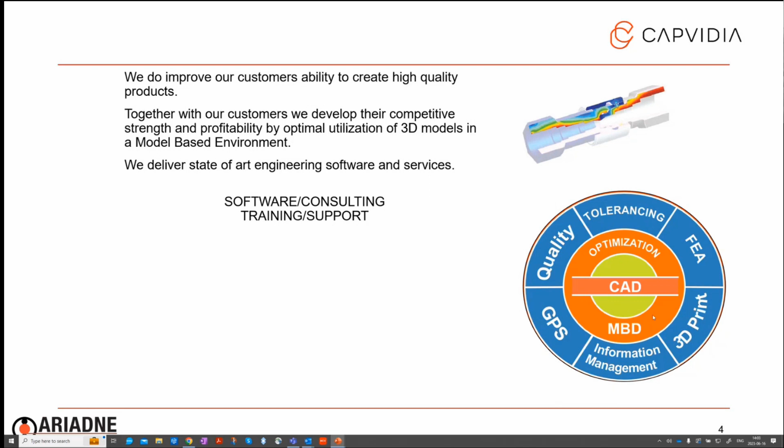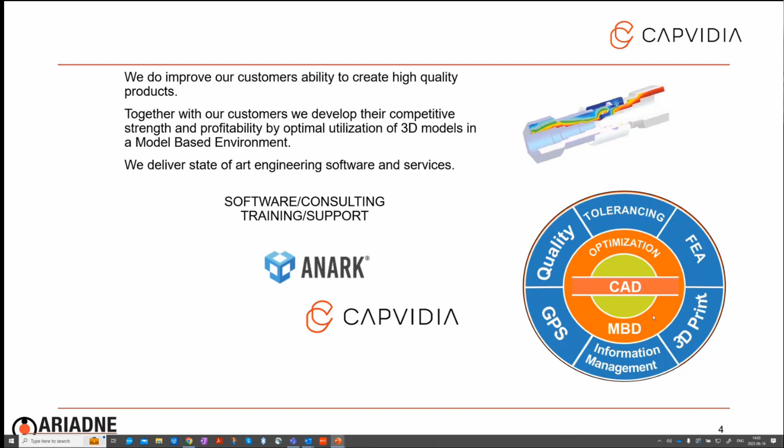We work with the following partners. Anark is an American company developing software for intelligent information sharing. Capvidia will be the central point of this presentation, a company developing software supporting metrology processes. And finally, Sigmetrix, automatic tolerance analysis with the main product CETOL 6 Sigma for 3D tolerance analysis.

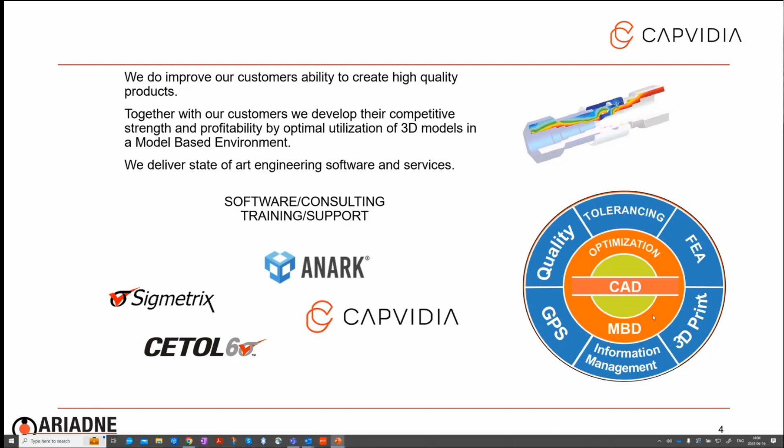Let me tell you shortly about Capvidia. Capvidia is the company behind the new ISO standard QIF. They developed the standard. They work closely with the ISO committee, ANSI committee, 3D PDF consortium, and other companies setting rules for information transfer, so to say. And they also work closely with major CAD vendors like PTC, Siemens, SolidWorks, and others. The software based on the QIF format is supposed to support metrology processes.

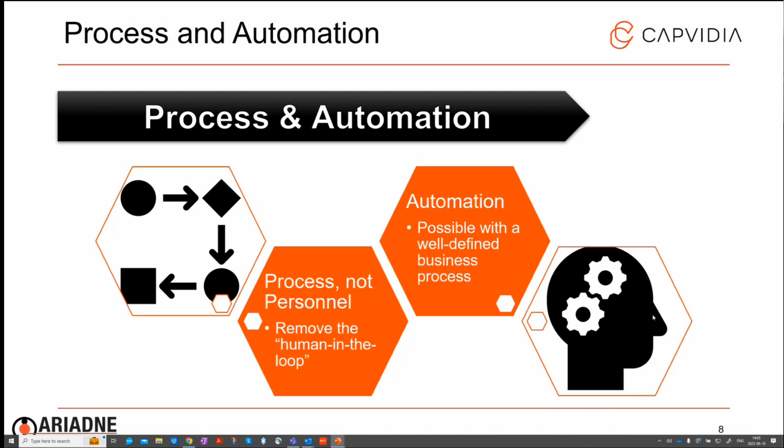And what is the value of automatic inspection? We would like to cover everything within product development, from design, manufacturing, and then quality control. We would like to go upstream, so capture and automate processes. And we would like to also go downstream, so unlock the measurement data for the design department to improve the product, not only use it for a go, no-go decision, but unlock the knowledge which is there. Looking at upstream processes, we would like to eliminate human errors and manual parts of the process and make it automatic.

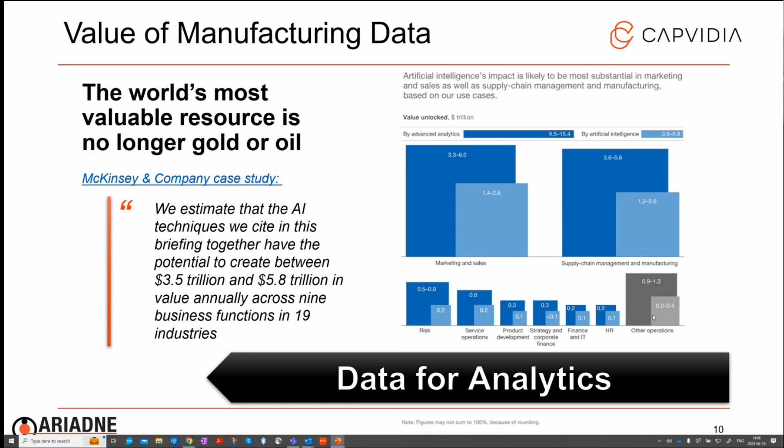When looking downstream, everybody's saying the new gold or oil is information. The highest rated companies on the market are companies like Google, Facebook, and so on. They deal with information. And we believe that when you measure your parts, it is a very good source of information about production processes, about the robustness of your product, and so on. If we can unlock this data and use it to improve products, it might be worth a lot of money.

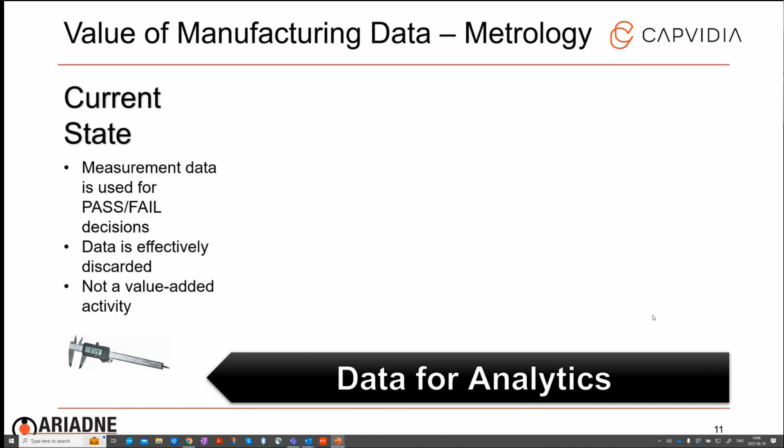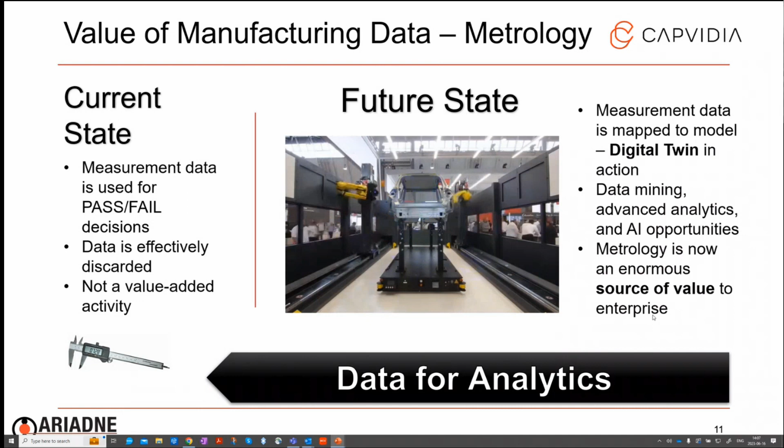So let's go further. The current state of metrology processes is mainly manual processes. Information is also used just for go, no-go decisions. So it's just verification, not added value, so to say. Imagine that we can work with regard to the digital twin concept and have full control of geometry connected to the design model. We can unlock data, maybe apply artificial intelligence to find trends and improve our tooling, improve quality and robustness of our products. So this is the intention.

And the base for this is the QIF format. QIF is the information carrier created for supporting metrology processes. It's very similar to STEP 242 in terms of geometry. We can save geometry with 3D PMI data with tolerances, but we can also put a bill of characteristics, so what we should measure, what is critical, and so on. We can also save hardware resources, best practice, CMM programs using the DMIS language.

We can also save measurement results, perform statistical analysis of the results and reconnect it to the CAD model. So basically on the CAD model, you can see measurement results, you can compare different suppliers, you can compare different batches and so on. And QIF has been an ISO standard since a couple of years ago.

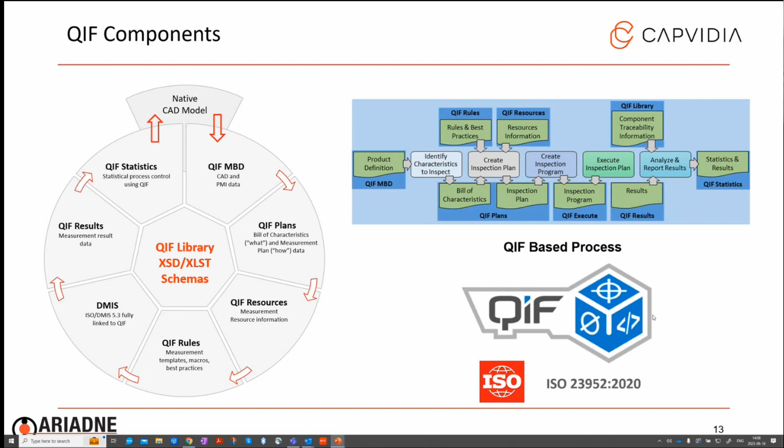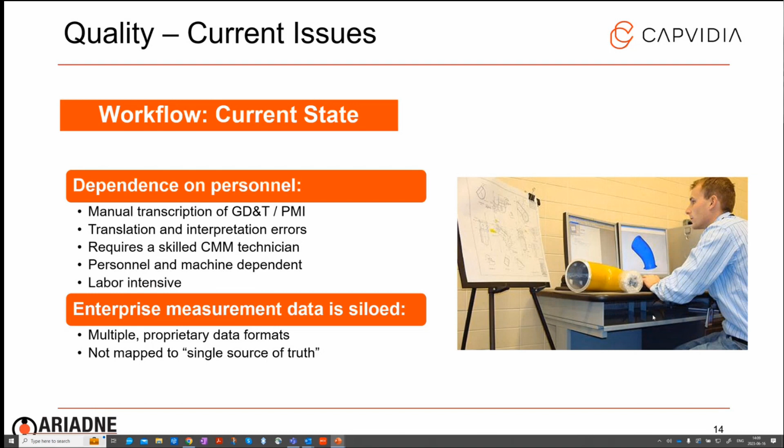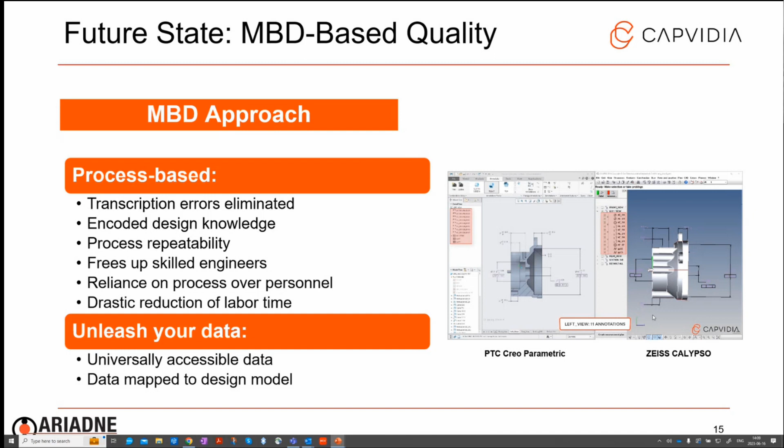Also, it means that we will make a decision, go, no go, and kind of save this data somewhere, but not use it. So we would like to propose an MBD-based approach, and basically data will be transferred from the CAD model to the measurement machine. We will eliminate all translation errors and so on, providing that we have good quality of data in CAD, and also we will unleash the results. We can do analysis of the results and improve our products.

Today, we can suggest two flows. One which is totally automated. So the lower one, MBD directly to CMM machine. And this requires very good quality of your specification in 3D and probably tweaking of the software, so all the softwares can speak to each other.

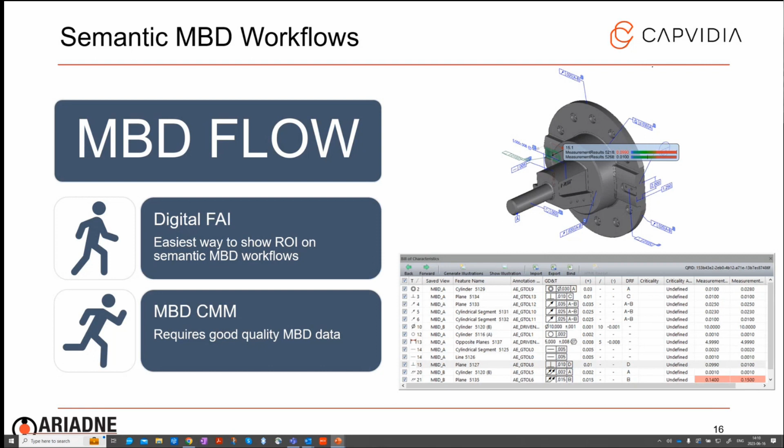The other way is to use QIF and through QIF go to Excel, create a first article inspection protocol, which is customized based on your industry standard, and let the measurement guy fill out this document, and we can save it into QIF and import to CAD. And this means that we will unlock the results, we can evaluate them, we can make them traceable, and so on.

And here is the example for model-based automated process. You see Creo and Capvidia software working together, and then transferring data to the metrology software called Checkmate. This process was entirely automated, so it's possible to do actually.

Here is an example for results. What happens when you do automate your metrology processes? We are very often talking about 80 to 90% of time reduction. I will not go into details of this project. If you are interested, please contact us. But here you see NX on the CAD side, MBDVidia and Zeiss Calypso on the metrology side with 97% time reduction. So quite impressive results.

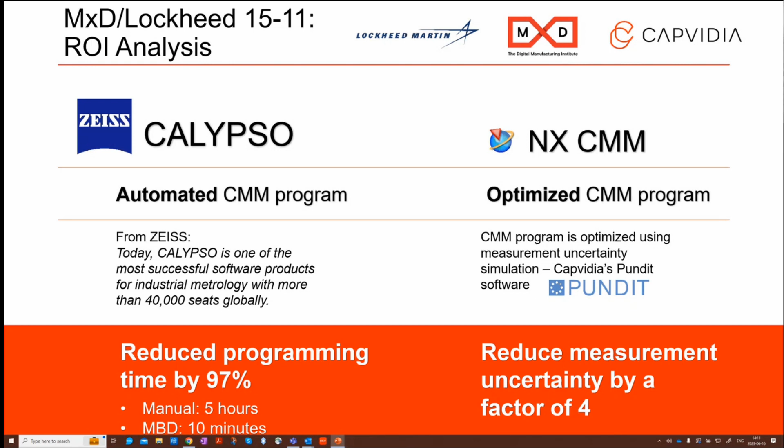And the other semi-automatic way, which we will show you today, it's more robust. It's based on QIF models. So from the CAD specification to QIF, QIF will generate a bill of characteristics in Excel. We will populate this Excel with measurements and send back to QIF and to CAD, and be able to evaluate the results. And this process is pretty robust and simple, so that's why we suggest it. It's a very good starting point.

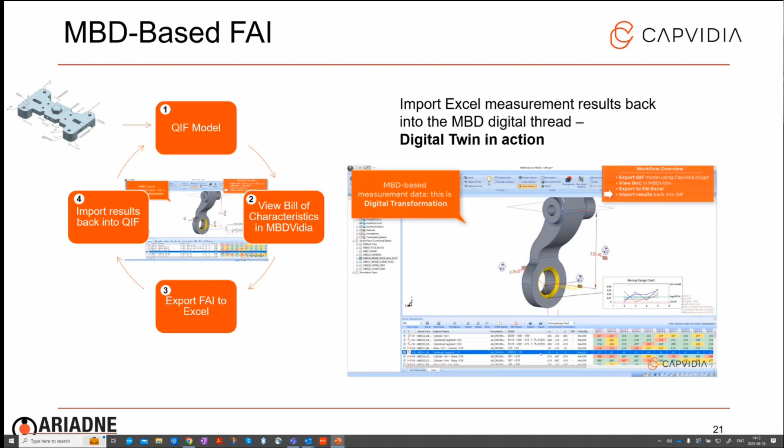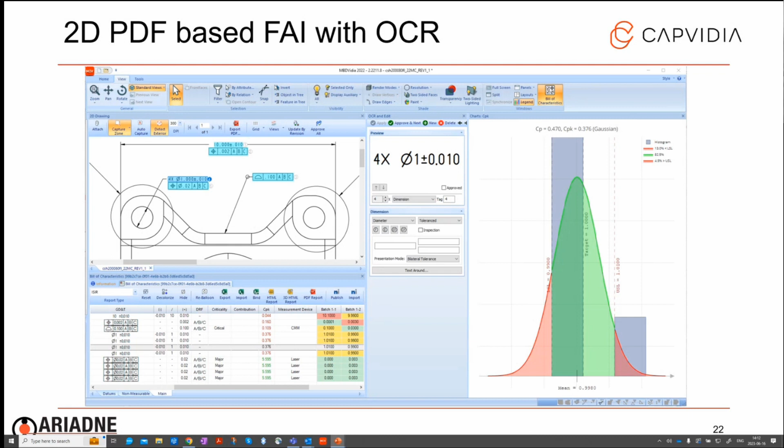And also, we can apply this process to 2D PDF drawings. So MBDVidia is using optical character recognition technology, and we make your dead drawings digital and also do basically the same stuff as with 3D models. So there is no reason to wait with this semi-automation of your metrology processes. So I hope it sounds good, but of course we would like to prove it by showing you the software. So now it's time for a 15 minute demo, and I will switch to Carl-Henrik.

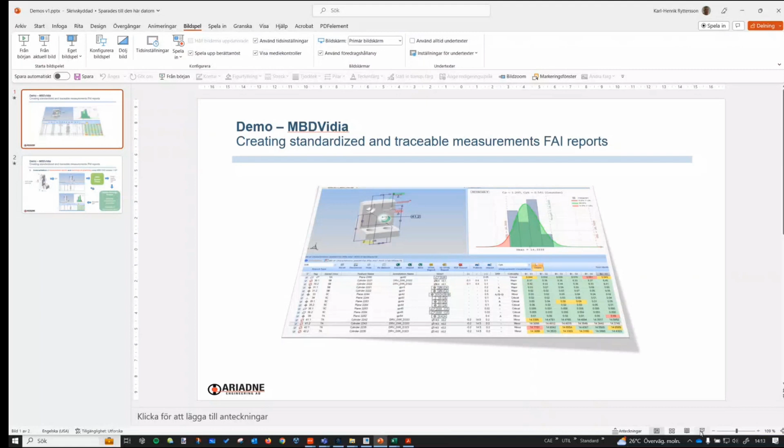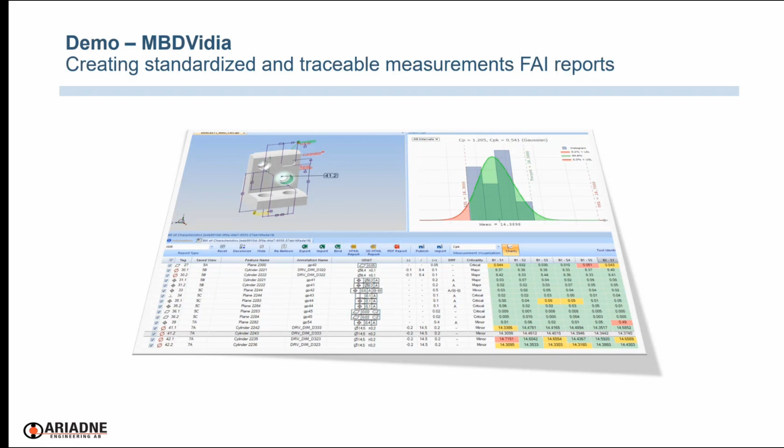Thank you very much. So basically I'm going to show you what Miroslav talked about. I'm going to show you mainly the software MBDVidia, which is going to enable us to create standardized and traceable measurement reports, first article inspection measurement reports. And I'm going to show it to you both ways. First, we're going to look at the full automation.

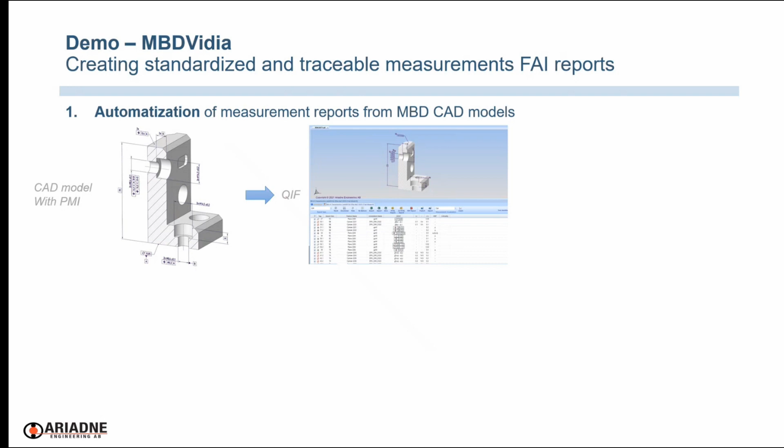So starting from a CAD model with PMI, so-called MBD. We're opening that in MBDVidia, and by that, it's going to automatically generate a bill of characteristics containing all your requirements with numbering, ballooning, and it's going to be stored in a QIF file. We can do several things with it, but one thing is that we can export this to an Excel format, an empty report, so to speak, which we can then give to the supplier, and the supplier can then fill it in.

And because there is traceability in all of this, the QIF knows that this Excel file belongs to it, and the QIF also knows it belongs to a certain CAD file of a certain version and a certain revision. So we can then import the information back into the QIF and do some simple evaluations with it. By standardizing measurement reports like this, we can easily compare different suppliers to one another, and also different revisions of components to one another.

And because we make the data traceable, we know which version it belongs to, so it gives us control over the data. As well, this enables us to make the measurement data more available than before. So not only quality engineers can access and use this information, we can also make it available for instance to design departments. So design engineers can use it to create better products. And this is a great way of bringing value to your MBD efforts.

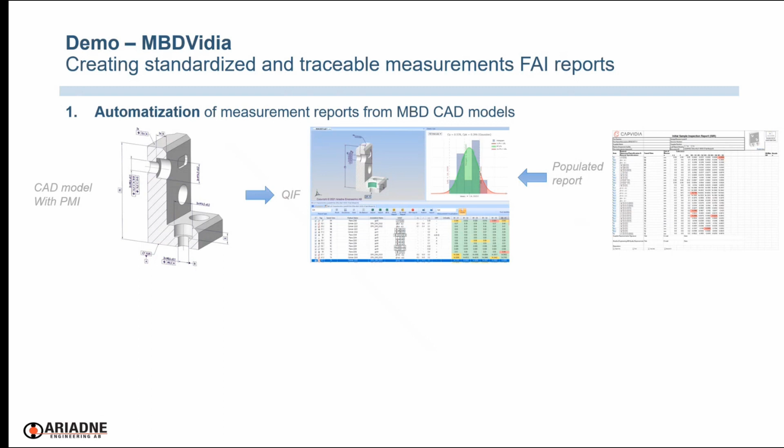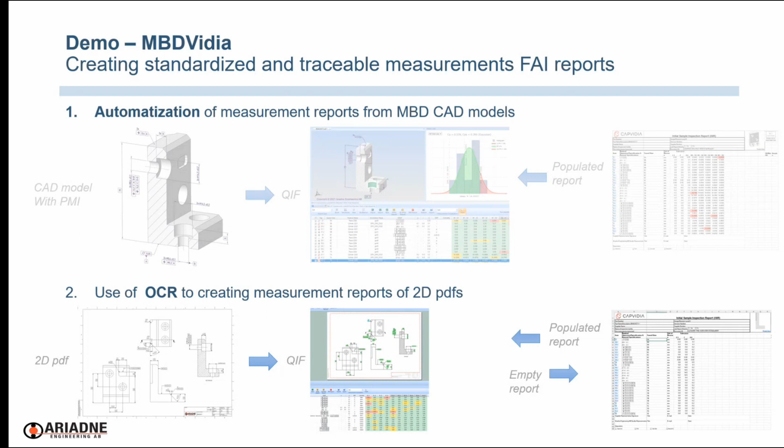So the second demo I will show you is using what Miroslav talked about, using best practice MBD in your CAD models. You might want to use your 2D PDF drawings, and you can benefit from the same with a semi-automatic process by using optical character recognition technique in MBDVidia to create standardized measurement reports. And then we can use the same scenario. I will also slightly address what Miroslav also talked about.

The holy grail is, of course, in the end, to fully automate this, not only to create automated measurement reports, but also to use this information, the QIF, to automate the metrology processes. So automatically program the metrology processes, as well as populating the report. So we want to send the QIF directly to the supplier. But before we do that, we want to make sure that the quality of the data is good enough, so that the PMI, the annotations in your CAD model, are well defined.

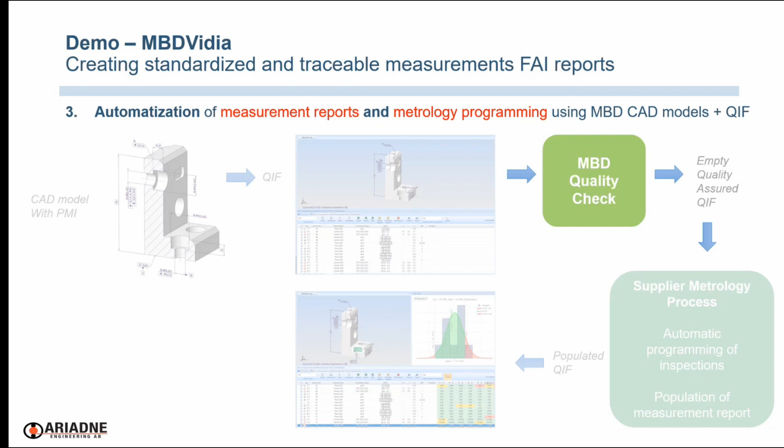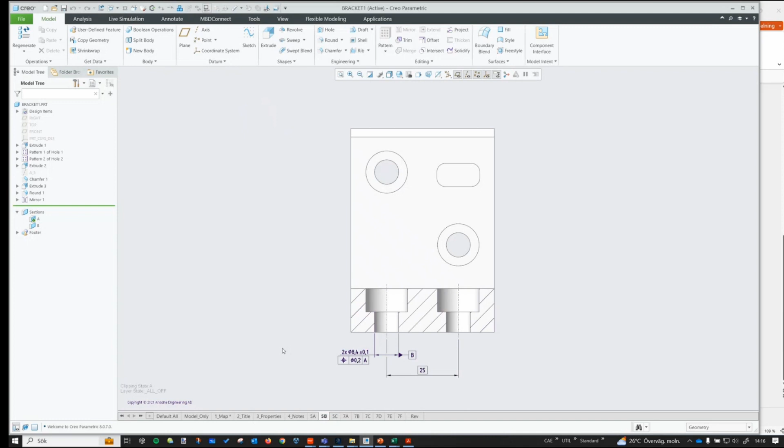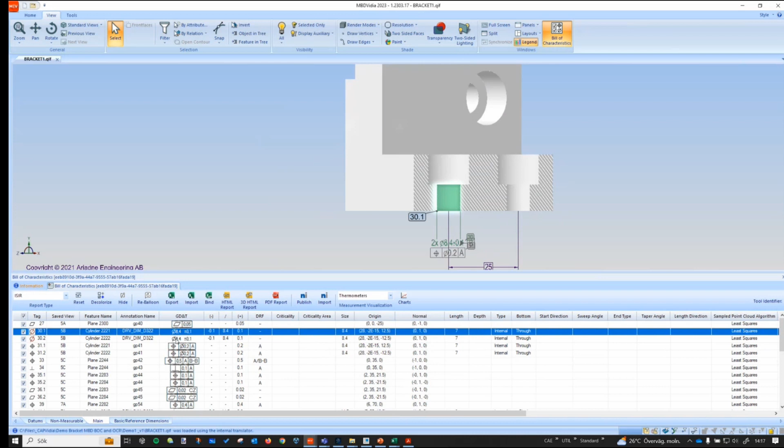So let's get started with a demo. This is my CAD model, and it contains PMI. So we're going to use the MBD approach to create a measurement report. From this, we can open directly in MBDVidia, and it's going to look like this. It looks like the same model, the same PMI coming in here, but with the difference that we have something called a bill of characteristics at the bottom of the screen. It has automatically created a list of all the requirements and also given a number to each one of those requirements. So this is the benefit of using MBD. It gets automated.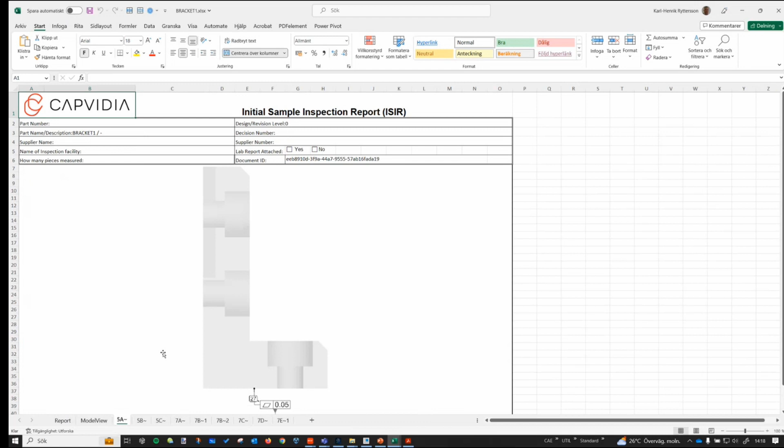So what can we do with this then? Well, in the end, we will send this QIF file directly to the supplier. But before we do that, you might consider using an Excel approach. So we can click Export Excel here, and you're going to receive an Excel format of this report, which looks like this. You have several formats to choose from, and you can also create your own appearance. This is called ISIR here. You get the same list you saw previously, but you also get pictures that were auto-generated because it's MBD. So you have everything you need in this Excel file. You don't need any additional 2D drawings in PDF or anything.

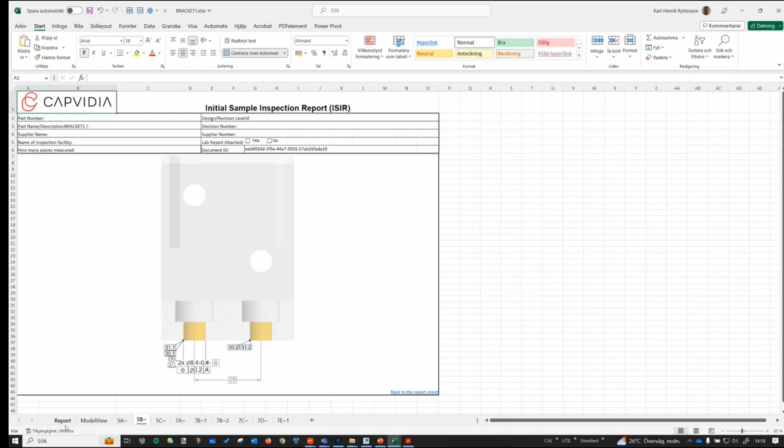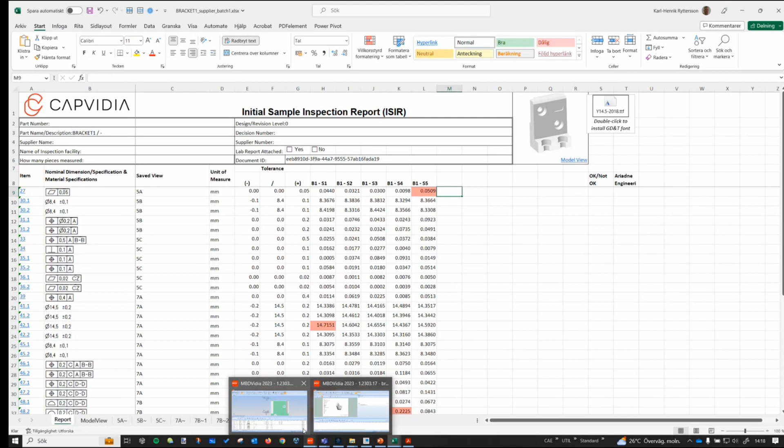Everything is contained here. So we can now give this to the supplier, which manufactures the products, then performs the metrology processes, the inspection, and fills in this list. And because of traceability, this Excel file can be reused. We can import the data back into our QIF. So if we go back to the MBDVidia application, previously we used export. Now we can use import and import the data coming from the supplier. We can even have different batches and tell them apart.

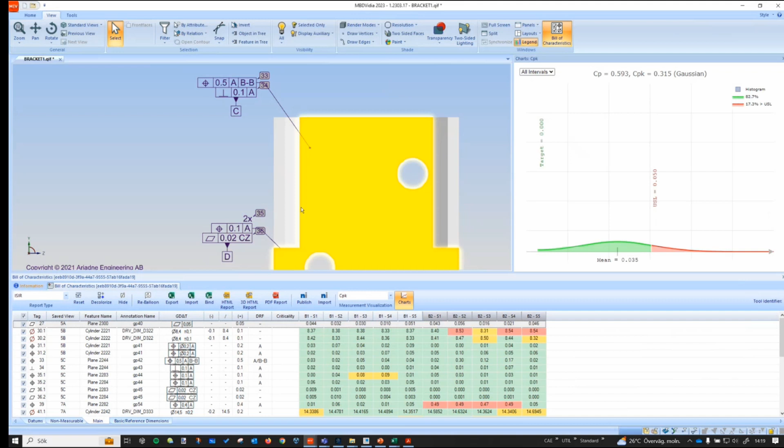So here we can see some results popping in, and I'm going to import two batches so you can see the difference. Let's say that's a new batch, and it also contains some simple tools to evaluate the results. As you can see, there's something called thermometers, and we can also look at capability values, CPK and PPK and more. So this is a way of dealing with reports in a fully optimized scenario. And now you're wondering, can we do the same when we don't use MBD, using 2D PDF? And of course you can.

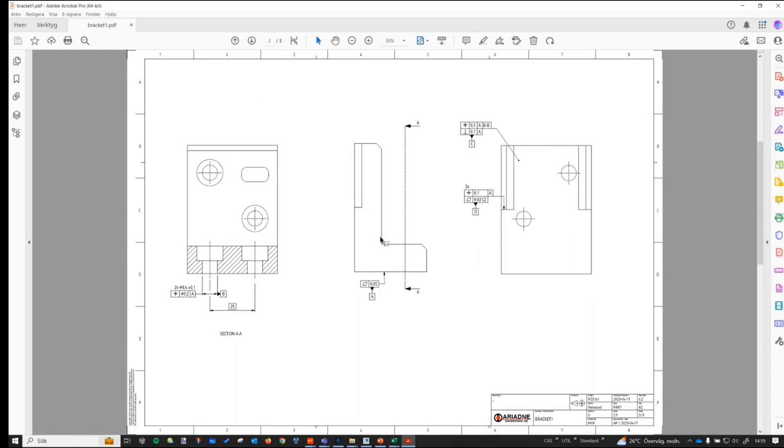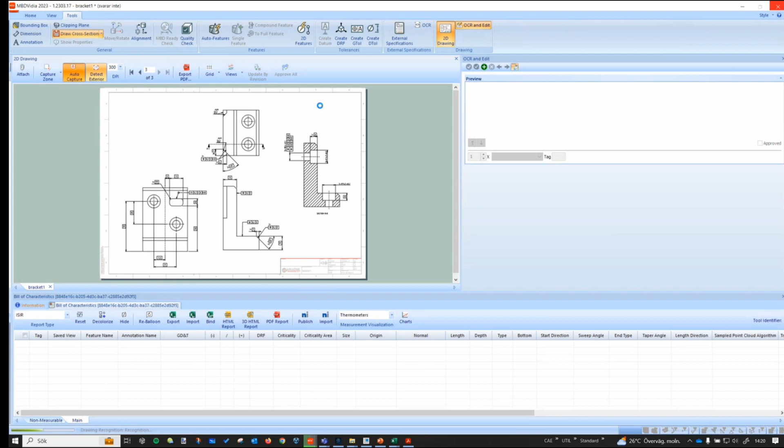So this is the second approach in MBDVidia, demo number two. Now we're starting from a different point of view. I open a regular PDF containing the usual annotations on the drawings. We can then use a character recognition technique to scan this drawing and populate the bill of characteristics. It's currently empty, so I'm going to press auto capture to try to capture all the requirements in the drawing at the same time. It's actually scanning the graphics in the PDF and trying to convert them to recognizable characters. Soon it's going to highlight certain fields in cyan, and it has actually identified lots of requirements here.

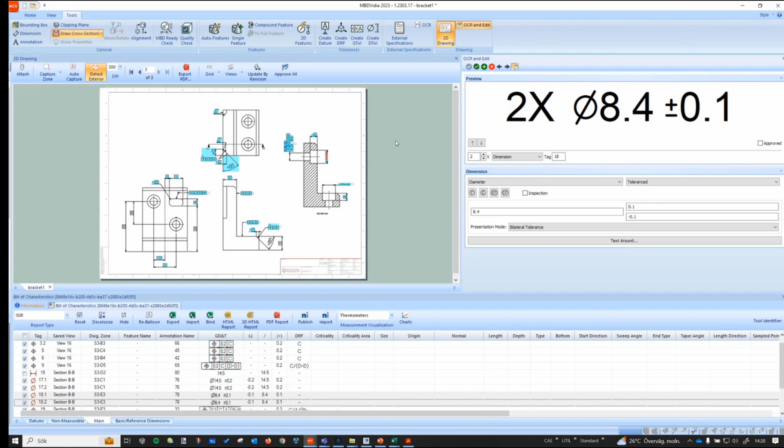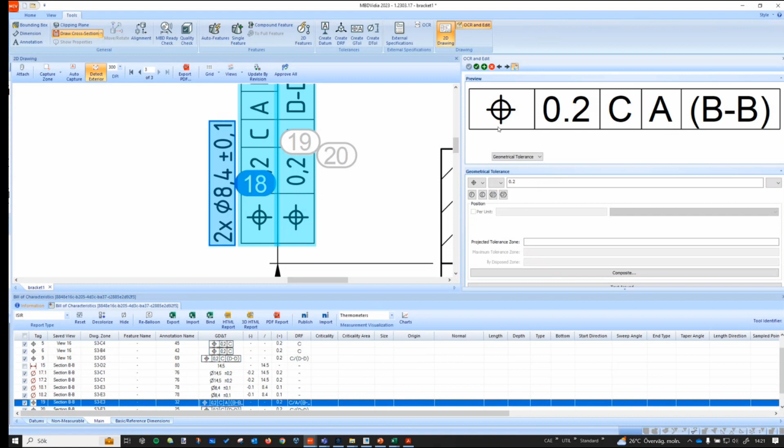So this is where MBD has higher quality of data. Before you send this protocol to the supplier, you want to make sure the annotations are captured correctly. So I want to approve each and every one of these suggested requirements. How do I do this? I look in the graphics window to the left, that's the graphics, and then I look to the right in my preview window, and that's what the recognized characters are. If they match, I'm happy. In this case they match, so I just press approve, and it turns green. It's approved. The next one is also a match, so I approve this one. And this one also matches.

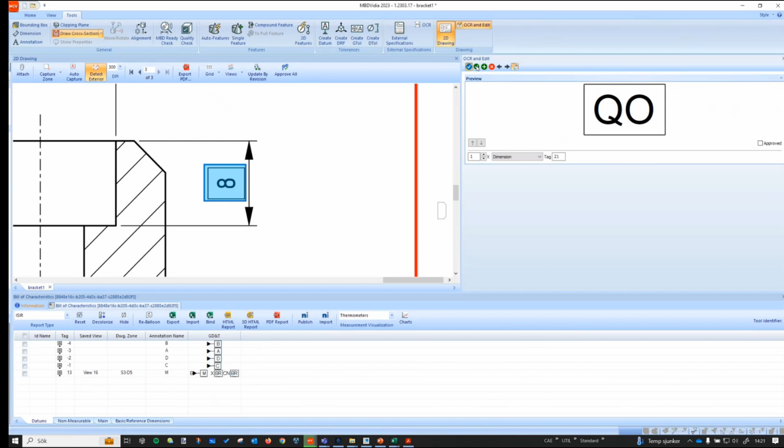So I keep on doing this until I get to something like this. And here it has not succeeded. It scanned it in horizontal direction; it should have been scanned in vertical. So I'm going to help it and say that this is not the QO, it's an actual dimension, and it has the number 8. So now it's fixed, and I'm going to approve that one.

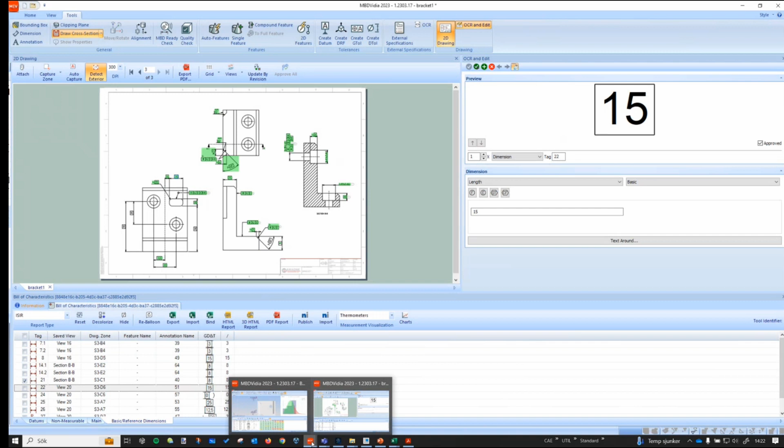And then I keep on doing this until everything is approved. I can skip to the end by approving everything. I wouldn't recommend doing this, but well, it's a demo, so we can do it a little bit faster. And then we keep doing this for all the drawing sheets. And finally, we're going to end up with a complete one. It looks like this. So here I have all my requirements, even the general requirements, turned into the bill of characteristics. So all my 3 sheets here.

And well, from here on, it's the same methods, same workflow as for the MBD approach. We can then export it to Excel and then import it back once the supplier has filled in the reports. And we can evaluate the results the same way as before. So this is a very quick demo of how these 2 scenarios work in MBDVidia.

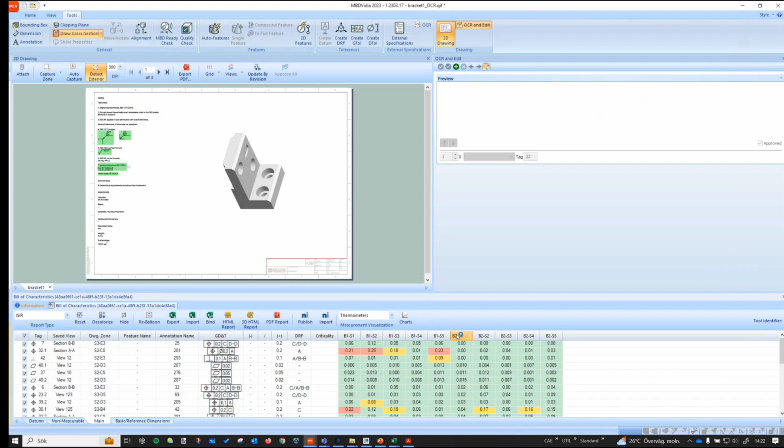And then I get to the holy grail. We want to fully automate this, so not only create reports automatically, but also we want to use the information in the QIF to automate the entire metrology process. But before we can do this, we want to make sure that, for instance, the PMI here have good quality so that the metrology software knows what to do with it. Also we might want to feed in some information about which measurement device to use and other types of metrology information along with it. Save it and send to the supplier.

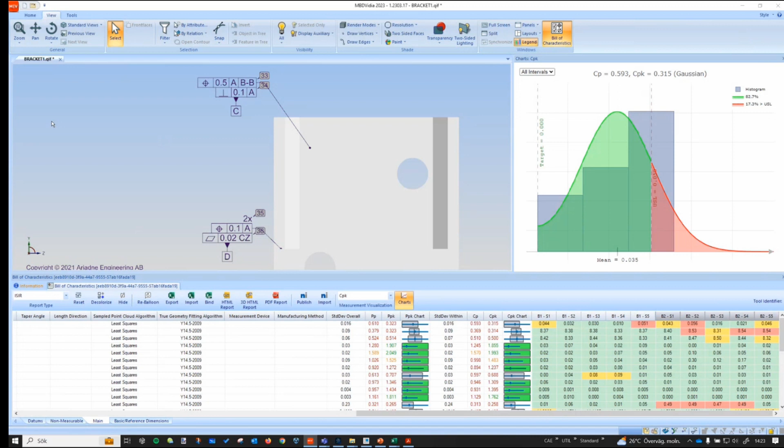But how do we control the quality of the PMI? Well, there is a function here, of course, in MBDVidia, which I'm going to show to you. So let's do that. There's a button here called MBD Ready Check. So I'm going to push it. And what it does now is that it checks all the PMI and checks basically that it's MBD ready, that it has sources referenced, all the annotations, and that syntax are okay. So in this case, it says 97% score. So it's not 100%. And there are actually 2 annotations which have some issues.

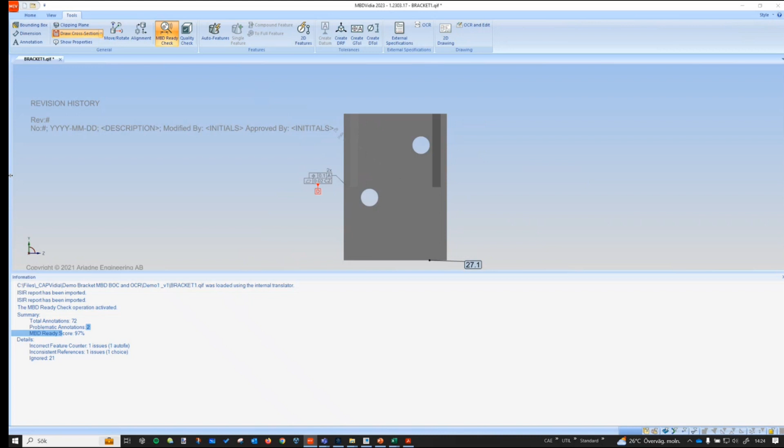So let's bring up the list of this. And here you can see that there's one here with an incorrect feature counter. So if we double click this, it's gonna show us which annotation this is all about. And it seems to be this one for the 2 times the hole 8.4. And I can see that it's incorrect feature counter because it's 2 holes, but it only references one of the holes. So now we can decide if we want to go back to the CAD model and revise it, of course, modify it.

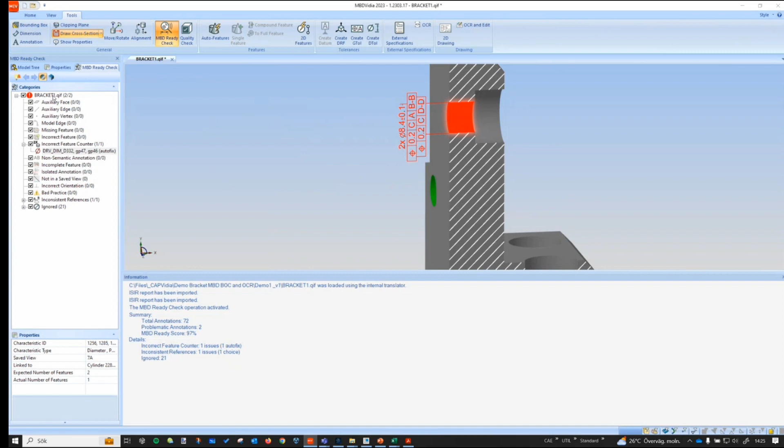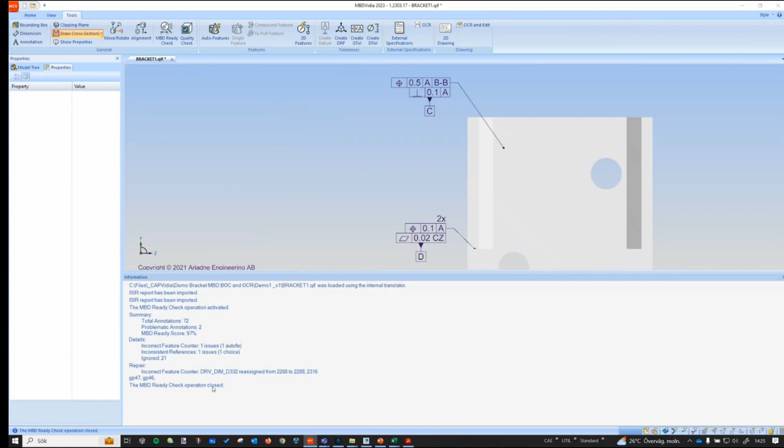Or you can choose to, if it's not a major error, use the repair tool in MBDVidia. So we can actually fix the problem here if it's too much of a process to revise the model, or if the error is not big enough to do that. So now it's fixed, so we can now redo the check, and this time it's 100% score.

And there's more to this, but since we have limited time in this webinar, I will now go on to the 5 minutes of questions, if you have such. So that summarizes my demo. I just want to also summarize.

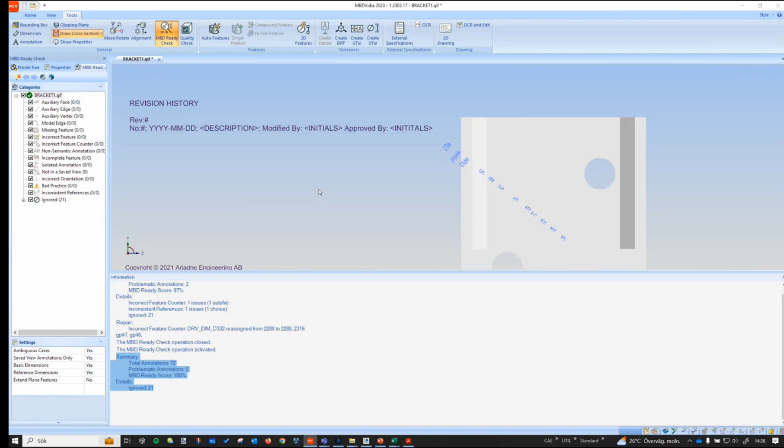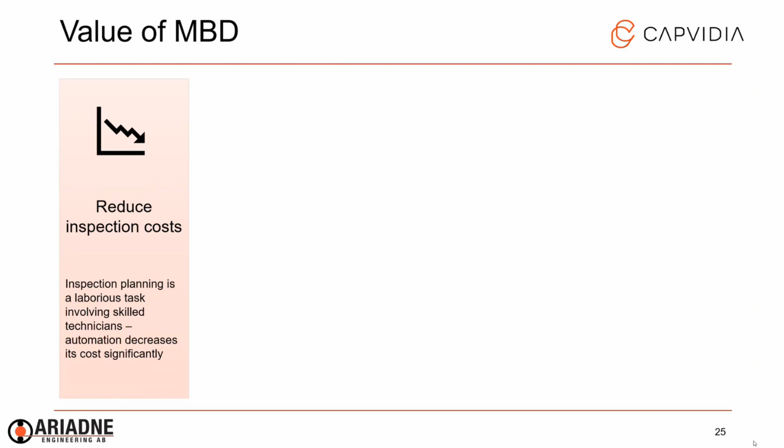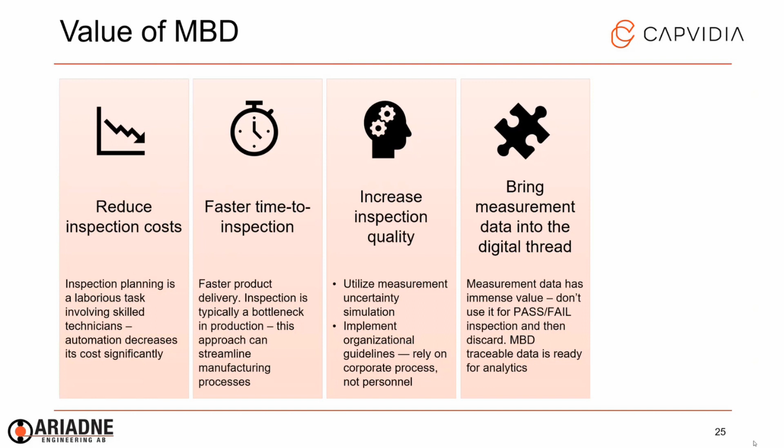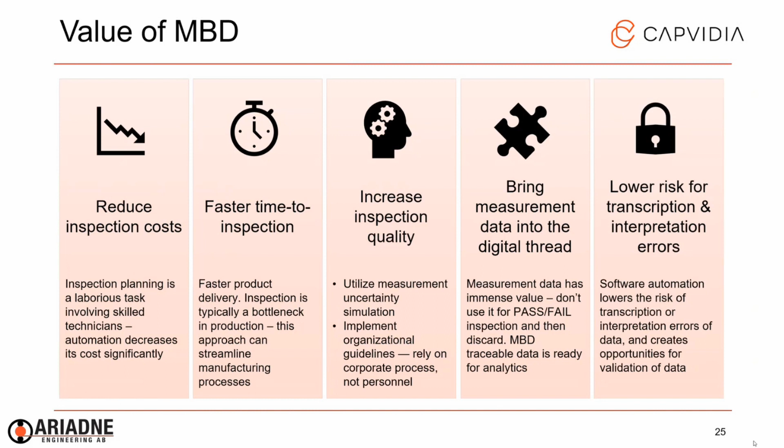If you use your model-based definition in a metrology context, you can reduce the cost of inspection, you can reduce the time of inspection, increase quality because we avoid manual errors. We can unleash the measurement information and bring it into digital thread, open it up for product improvements. And of course, we'll eliminate all the data transfer errors. So it's worth to do it.

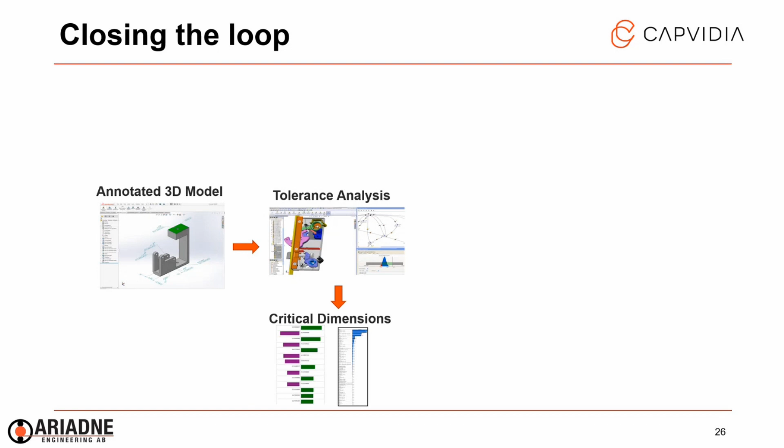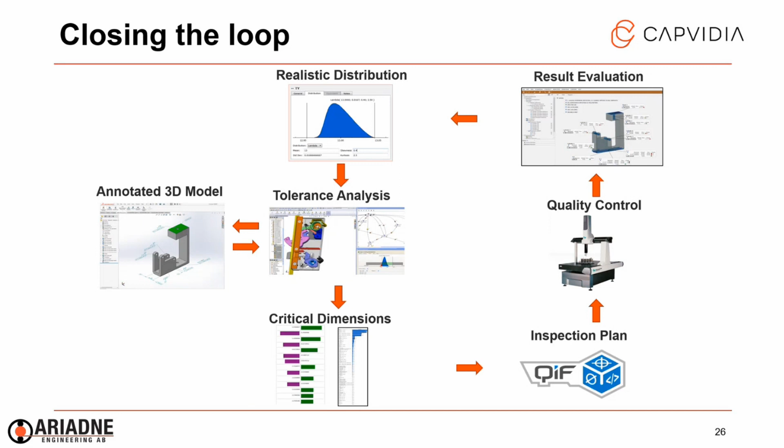If we go forward even more into the future, we can also connect measurements to tolerance analysis. In the proposed scheme, we do tolerance analysis on your 3D model. It's pretty simple. When you have 3D PMIs, you will find critical dimensions to control. So this will be the base for your inspection plan. And when you do the quality control, save results into QIF and find realistic measurement-based data as an input for tolerance analysis, refine tolerance analysis and improve your product. So it will be kind of closing the loop, connecting reality to theoretical analysis. And everything will be in your 3D model, traceable and so on.

How to start? If you are interested in these issues, please contact us. We will probably suggest starting with the Excel-based, QIF and Excel-based semi-automatic method, but we can also take a look at full automation if you are interested.